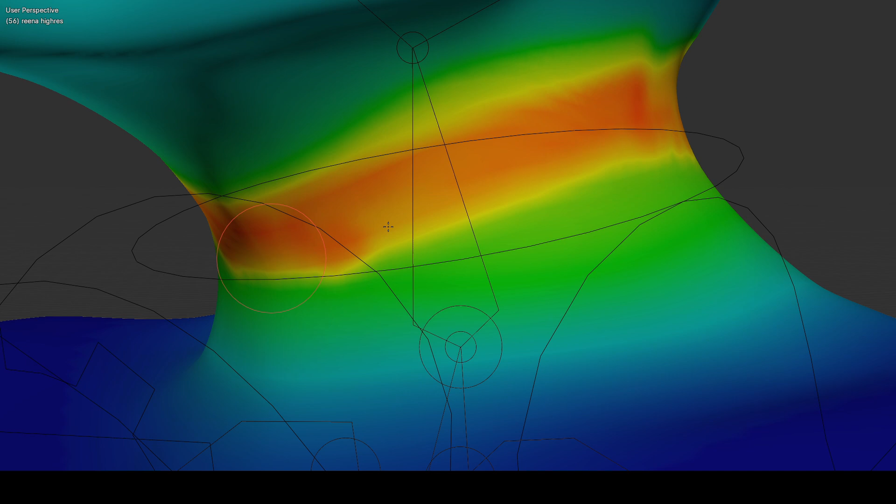Mostly people don't do this work. Especially nowadays, youngsters are not doing this much.

Whatever is automatic weight paints, it is automatically weight painting. They will adjust with more bones. Suppose they don't want this deformation on this arm bone, if they think the arm bone should not interfere near the breast area, they'll put one extra bone here so that the arm bone will not interfere with this upper portion. Like that they will try to adjust it.

So let's remove this. For the neck, we have to remove it.

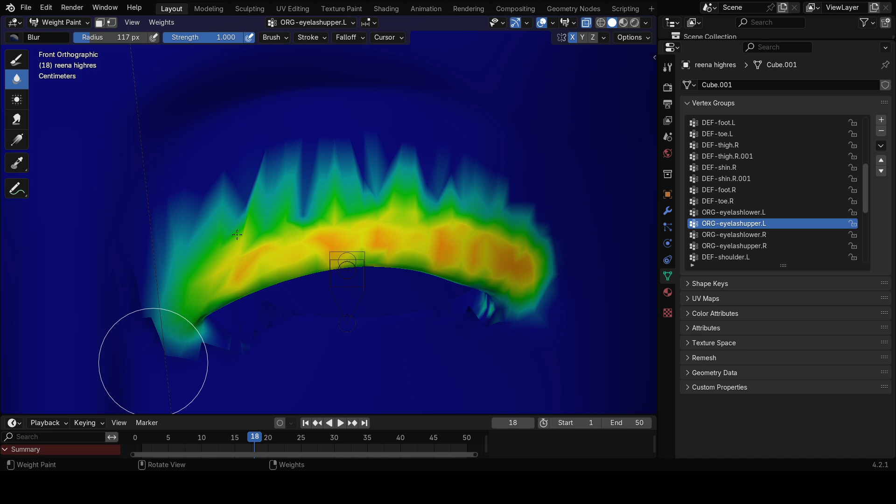Oh my god, see, this is one problem actually. When I undo this one, all these actions will be taken into account. It will all be considered as one single action.

Now X is switched off and weight is 1, strength is 1. Here upper left lid, upper lid is selected. Okay, now let's paint it. Maybe let's try 0.3.

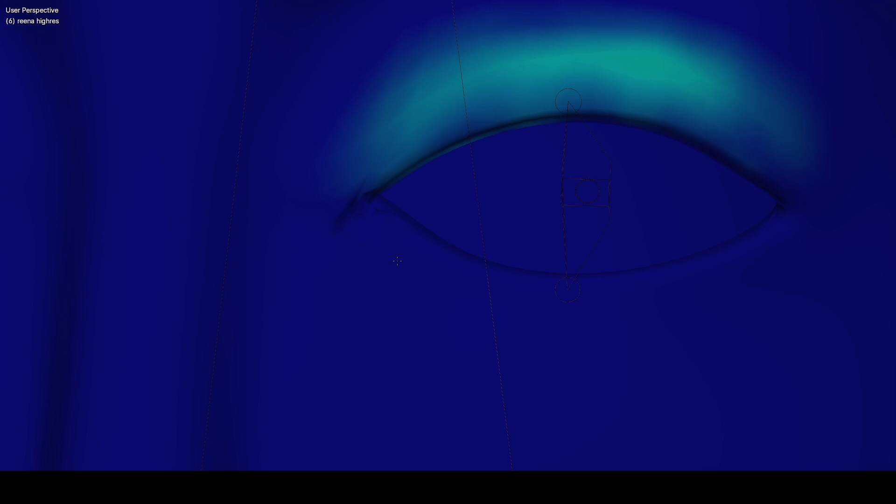So here we'll have to really do hard work painting. It's not an easy task to paint a heavy high-res model.

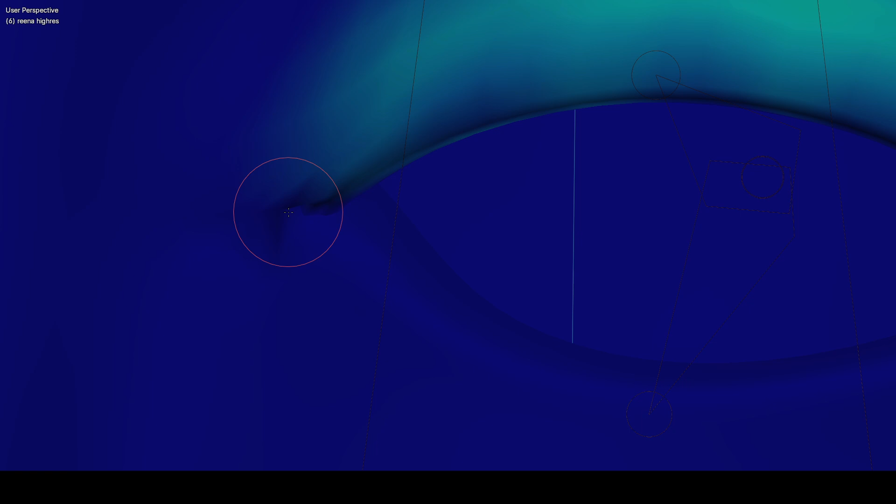You have to patiently remove them and then do it. So till here we have done to some extent, we have to remove it, still up there actually. So with that we'll stop. Now let's just play it and see.

If we have three bones - no, here one bone - then this bone will be moving more, and this bone here will be moving less. So this crash won't happen. That's why I told three bones we should do.

Same thing we have to do for the right upper eyelid also. Same gradient work we have to do.

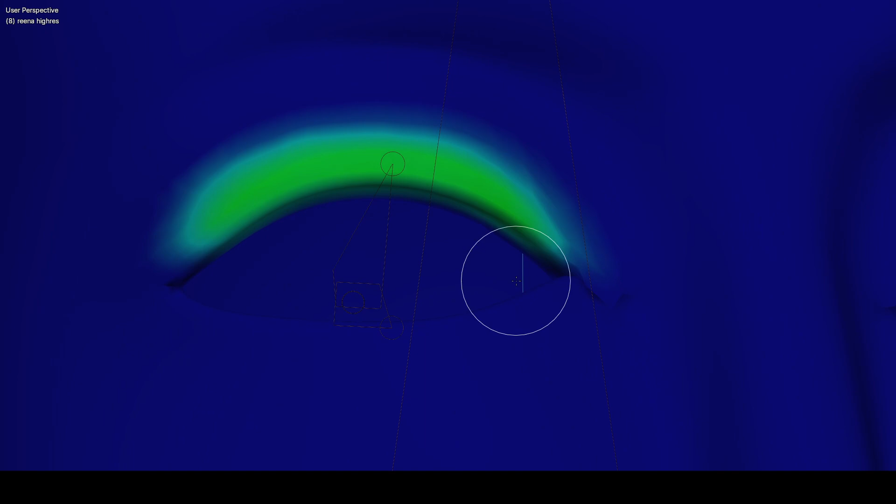Just move it and see like this. So till the 10th frame we can move actually, not more than that. So we'll have to bring this guy also a little more upper, and then we have to do it. Let's see, if we have time we can do that.

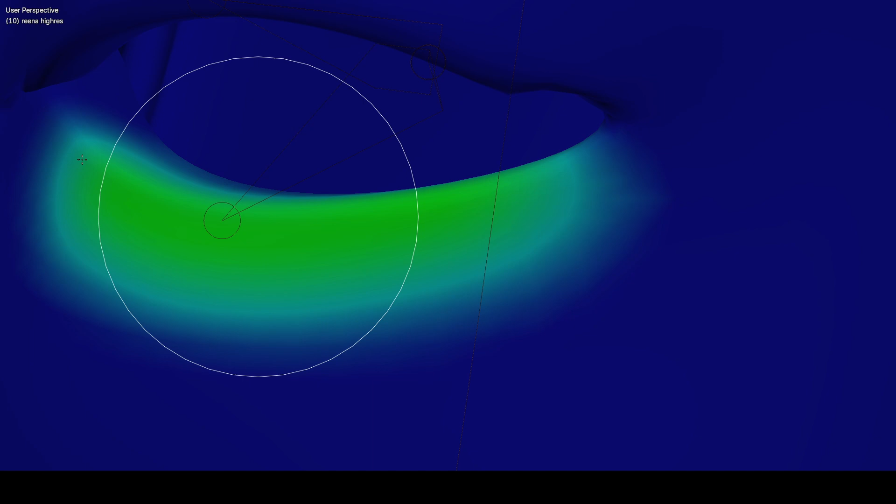Lower left. Right, so the next one is lower right.

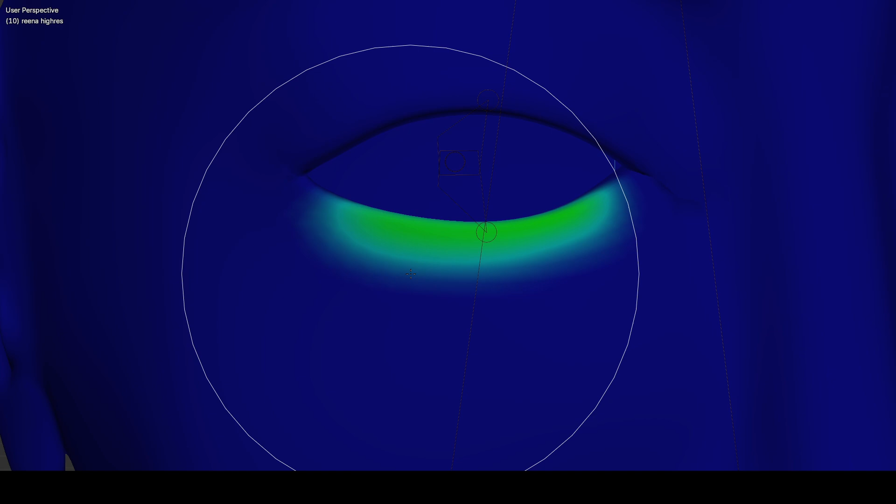Select the bones, bones mode. Select both of them, lower lids, and keyframe it.

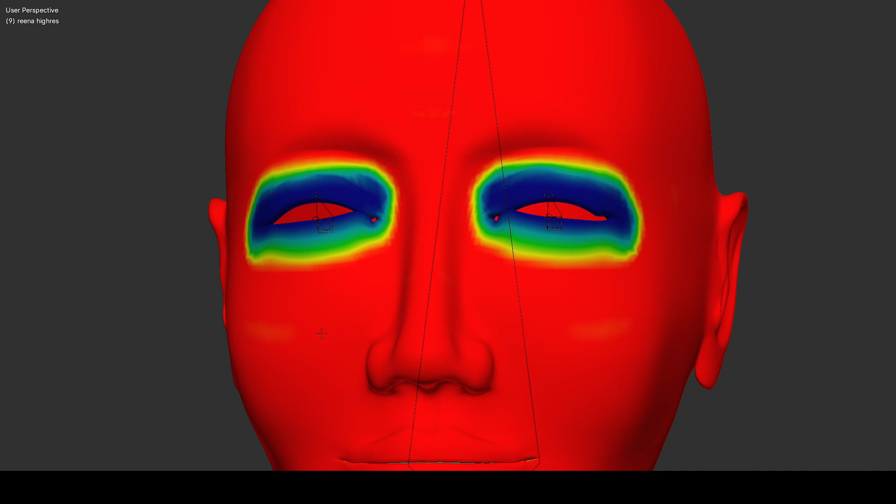Let's move it back and see.

Okay, so these vertices should be - that is, they are neither bound by the head nor by the lower eyelids. So we can just select them like this.

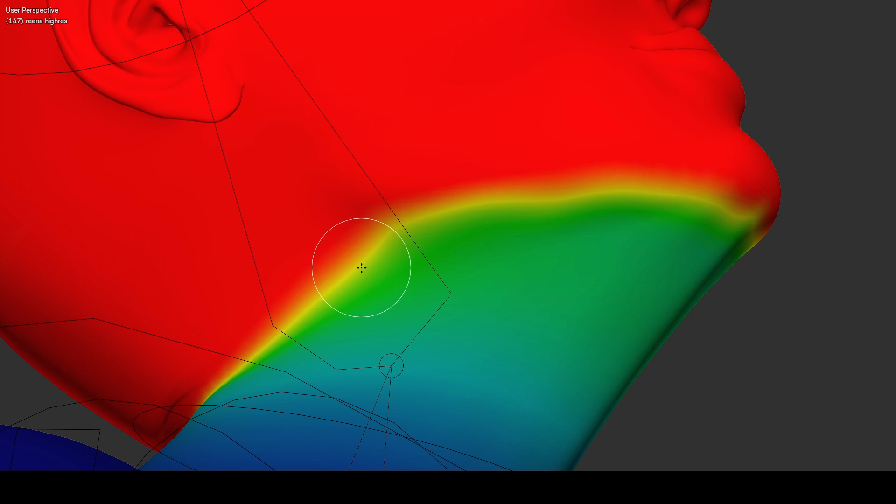For the neck we have to paint, only then this will get removed. You have to paint anew for the neck, so it will get removed.